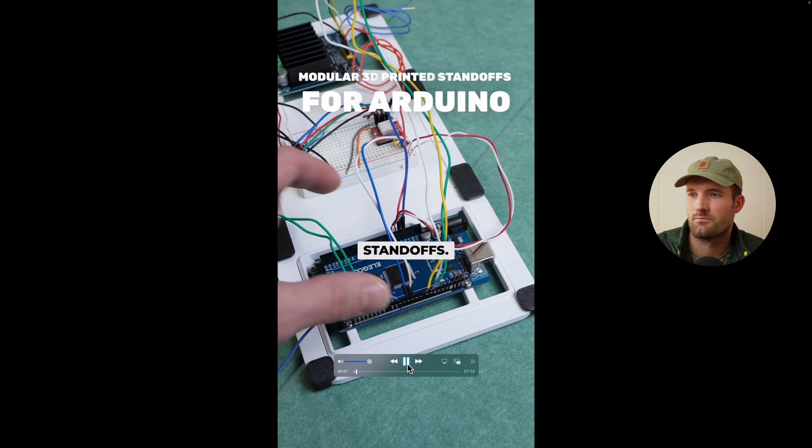Here's how I made these modular standoffs. While I was prototyping a new idea, I got annoyed at how unorganized things were. So I came up with this modular concept. I started off by making a standardized border piece the size that would work for most components.

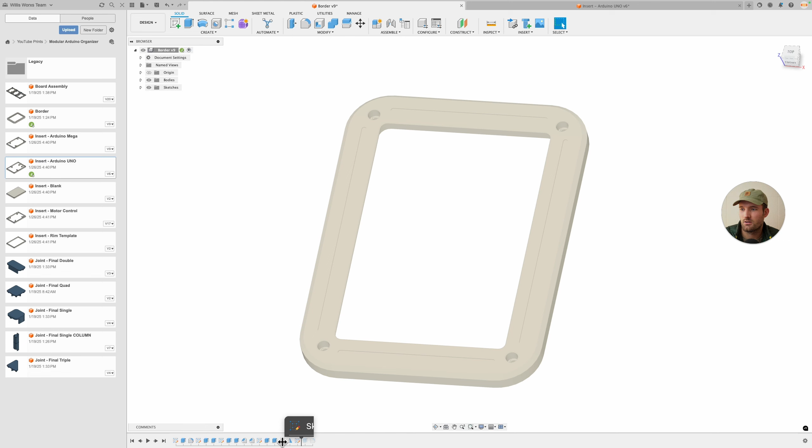So this is the border piece that I was mentioning earlier. Go ahead and make this a little smaller. And the way that I made this was I kind of just measured the Mega and then some other pieces and basically based it all off of that. And it took me a little while to figure out what my end shape would be.

So if we go back here to the first sketch, essentially I just made a size that I thought would work. So I did 120 by 80 as the inner insert size initially. And then you'll see here, I extruded that out and then added a fillet on the inside. And then I think I just basically created this new offset off of that.

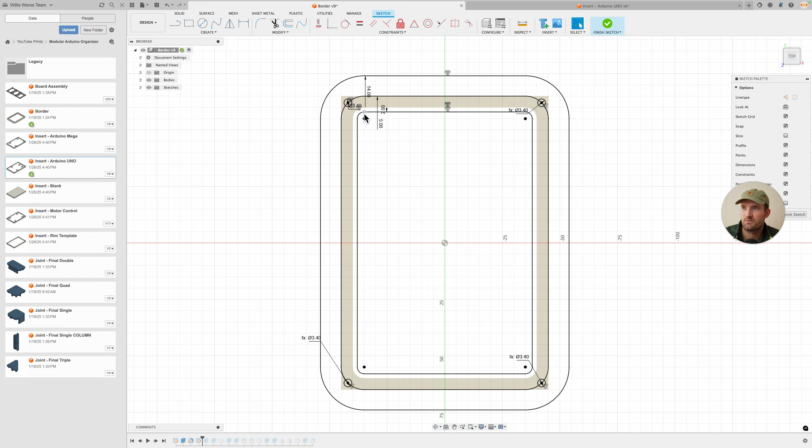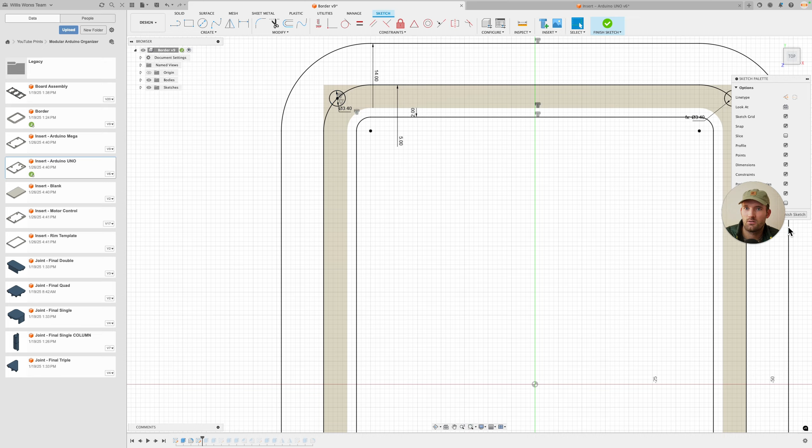And this is when I was playing around with where to put the holes. So I like symmetry in general. So if I put a hole here, I usually like to have the walls equal distance across. But I also added a chamfer here. So when I added that, the face here looked a little asymmetric. So I actually pushed this off a little bit further than I did this inside wall that I'm making here. And you'll see that here in a second where it's a little bit asymmetric.

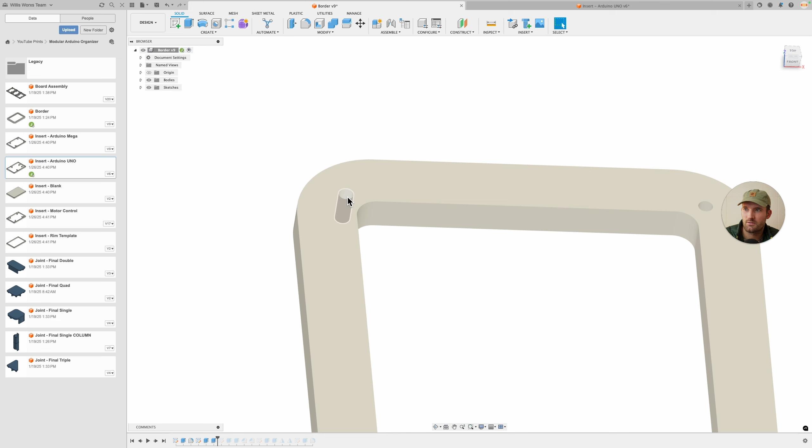So that's the outside wall, and I haven't made the holes yet. I just have the cutouts there for it. And you can see here that the hole is a little bit closer to the inside wall than it is the outside wall. But basically I know that in the future I'm going to add a chamfer here. And so you'll see that come in, and then it'll essentially be pretty similar as far as how much flat area there is between the center of the hole and this edge and the center of the hole and the chamfered edge there. So just going to keep stepping through.

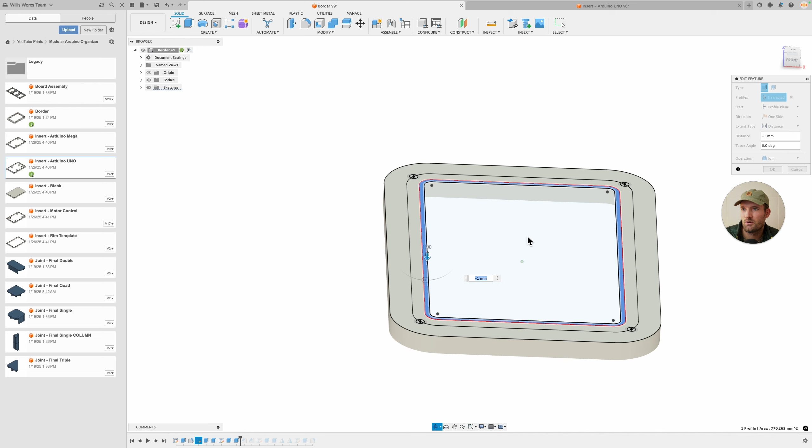And this is where I just added the offset so that the head of the bolt can be flush with everything, or recessed, I guess. And then stepping through, that's where I cut out all of the holes there. And then, let's see, here is where I'm adding this other offset on the inside. So that's basically to have a lip so that, as you'll see in a little bit, it'll hold the insert back essentially. And then we added that chamfer I was talking about.

Now you can see how the face is pretty much the same distance from this edge to the center and from this center to that edge. We can actually measure that real quick. I just use a line here. You can see it's 7 millimeters, and then to this edge, it's right at 7 millimeters as well. So that's why I did that.

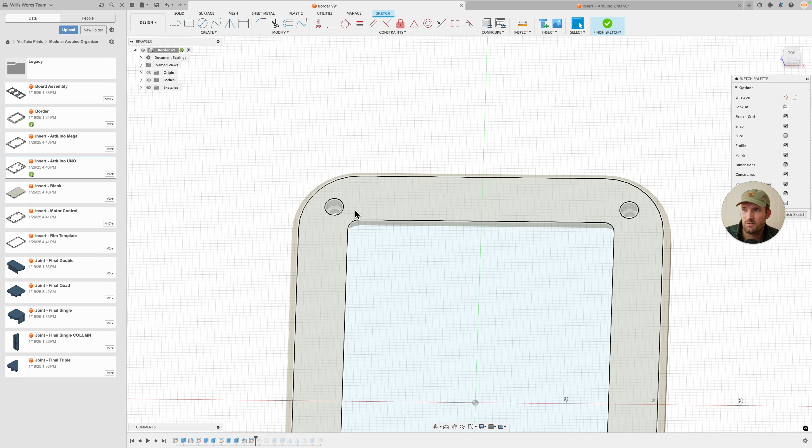I don't really know what the principle in design is as far as whether you're supposed to use the actual edge or the edge of the chamfer. It just makes more sense to me at the flat, because that catches my eye, how much flat is between the edge here and the edge here, rather than including the actual edge of the wall there in the calculation of how much space is between pieces. But that's just how I think about it. I don't know if that's technically true or not as far as what you're supposed to do.

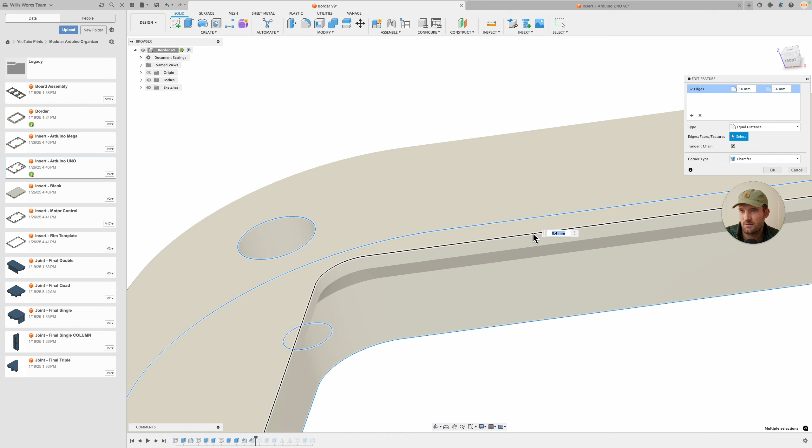And then here I just added a lot of small chamfers. So I talk about this a lot, but just adding even just 0.4 millimeters of a chamfer really makes the design look a lot better. Just the sharp edges, especially wherever it's printing against, it doesn't always turn out well. So I think adding that really just makes everything look a little bit more refined.

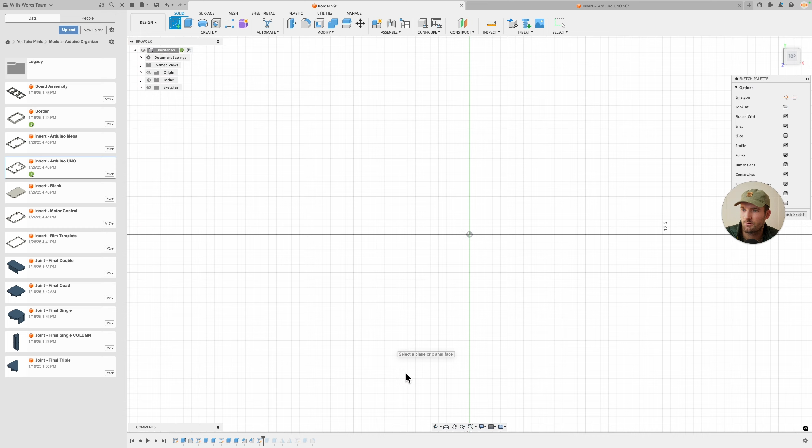And then let's see here. Okay, so this is going to be a part that I want to talk about a little bit, and I'll actually just remake this sketch just to show y'all what I'm doing here. So what I'm doing in this step, and it's really not necessarily needed for these smaller holes, but if you have a bigger recessed hole, it's really important.

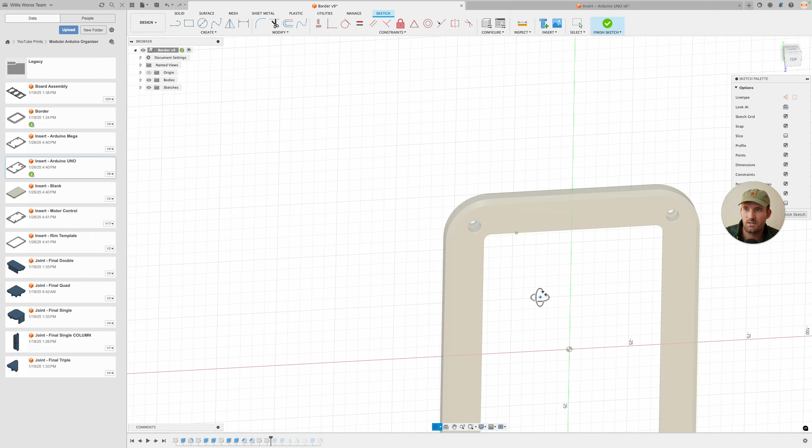And I actually learned this from Prusa, which did this, and then there's a video from Maker's Muse that also kind of demonstrated it. But essentially what we're going to try to do is force the printer to bridge over this, because we're printing this face down to give it a good texture. So it's going to be printed like that, like this is the bed plate. So what I'm doing here is I'm essentially about to force this to bridge, and the way that you do that is by making some rectangles.

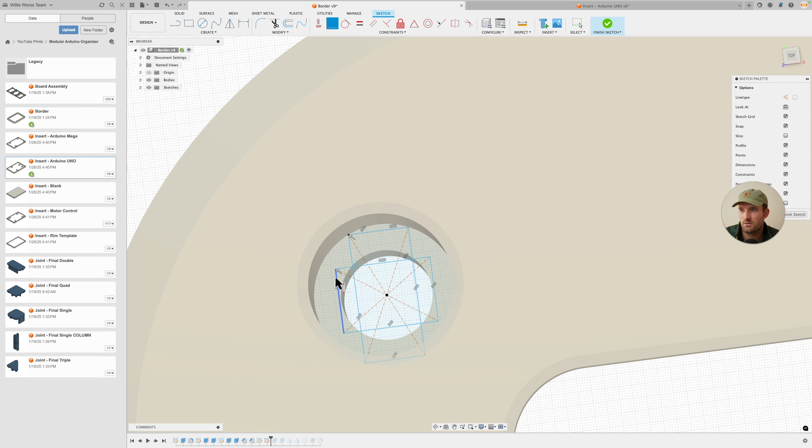And so I'll just zoom in, and then I could do some constraints here. So you're going to make one kind of this direction and one the other direction. And so each of these corners are going to be constrained to the edge of the circle there. And then I'll also make constraints that are tangent with the hole in the middle. So then tangent with that, and then I'm also tangent with this and this. And so now we have these basically two rectangles there.

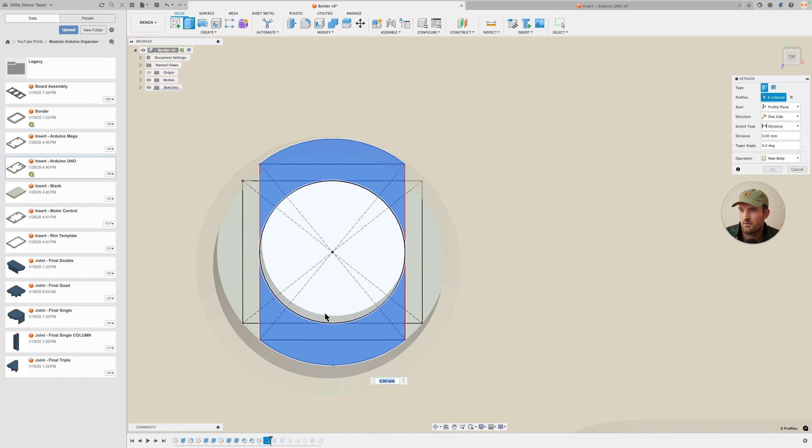And so the first step is I'm going to extrude all of this all the way across by -0.2. So just one layer height. So depending on what layer height you use, just take off essentially that amount. So -0.2. And so you'll see here, I can actually change just that face color. So we just extruded out that amount. So you can see there's a little wall there, and from there to there is 0.2 millimeters.

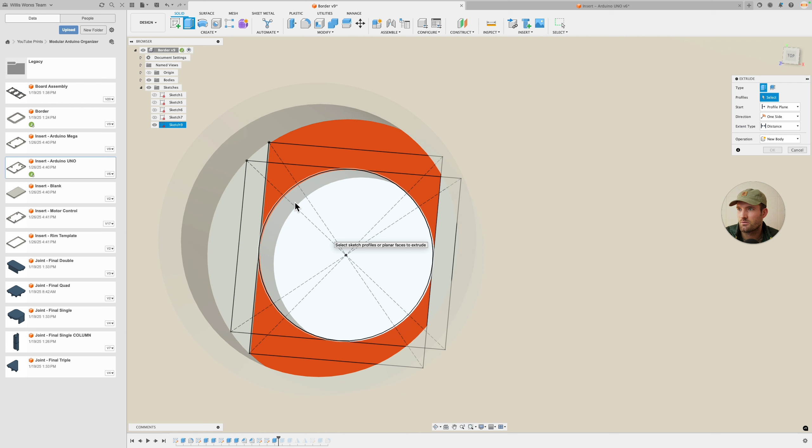And so now I'm going to bring back that same sketch again. And now I'm going to extrude again, just this square part. And now instead of just 0.2, I'm going to do -0.4. So basically 2 layer heights. Click OK. And so now you see we have another layer, and I'll just color that again just to make sure we're all on the same page there. So now you can see we have this, and this is basically 3 different layers.

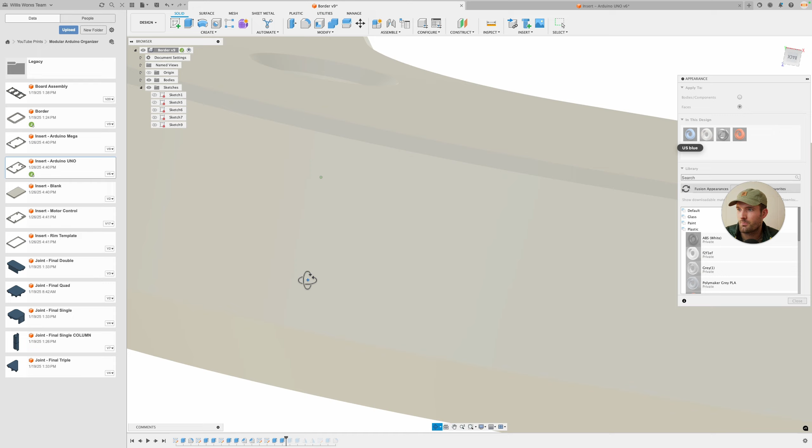And so what this is doing is, remember, we're printing this way. So we're basically coming up this direction. And then once it hits here, the printer is going to just go straight across. So it's just going to do a little bridge, and this is maybe 3 or 4 millimeters diameter, so it can bridge this really easily. So you're just telling it go straight across, and it's going to fill this in, and then on the next layer, it's going to go straight across again, because the orange is our next layer. So we're going to have this support, and then we're going to go straight across, and bridge.

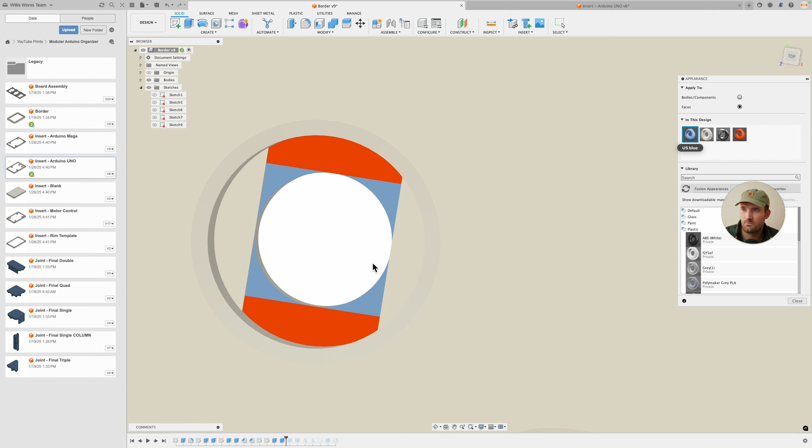And then it's going to do this circle, and so it's going to already have these 2 pieces that are kind of supporting it. So the circle should come out pretty easy, and that's just to prevent the need for supports here. So I just want to walk y'all through that, and I'll actually just export this really quickly and show y'all what that's going to look like. So just hold on just a second, and we'll pick back up once I'm in the slicer.

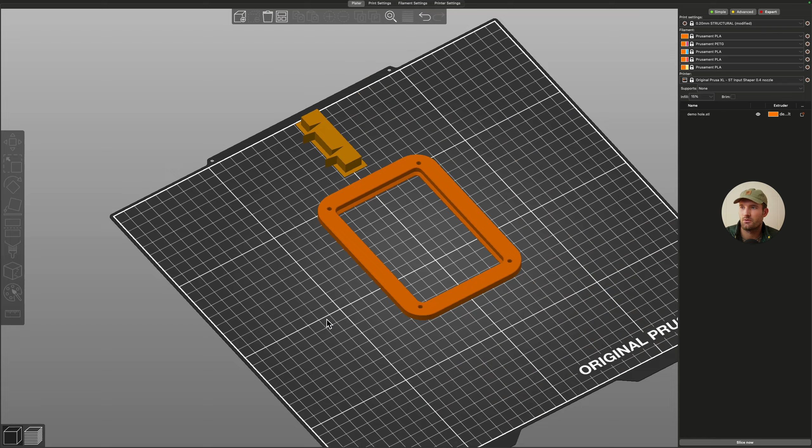All right, so now I have it in the slicer, and you can see here that's our feature that we made. So I'm going to go ahead and put this face down. The reason we're doing that is because we want the nice textured finish on the part that we're going to see the most.

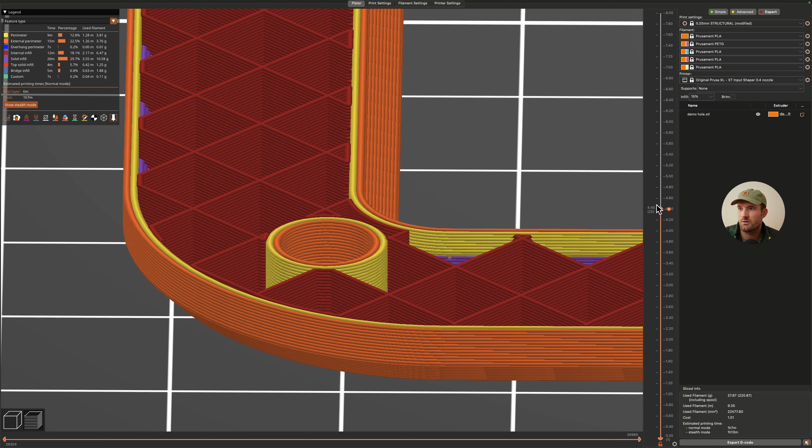So I'm going to go ahead and click slice, and you can see here on this one, which is the one that we did that operation on, how it has this kind of box shape, which is what we did. So I just want to step through really quickly what's going on. So this is just kind of the standard infill, and then once we get to our layer that we made, that's our first layer where we cut out basically this parallel part here, and you can see what I'm talking about. It's going to bridge straight across, which is what we want.

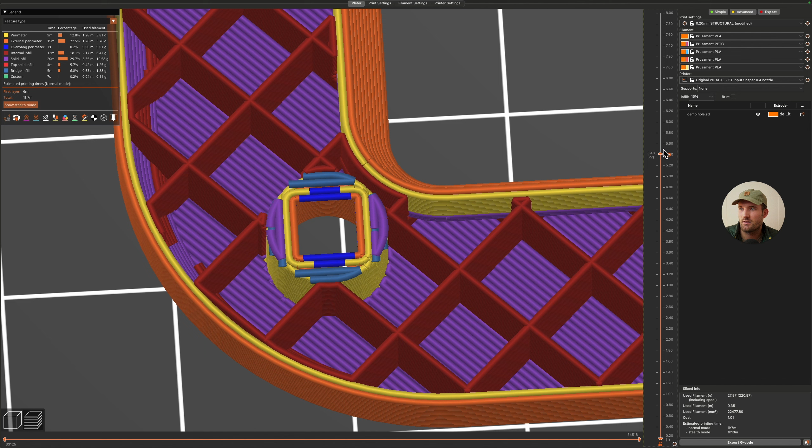And then the next layer, we bridge the opposite direction, and it makes kind of a square, but you can see it has support here. So really all that you're bridging is just these sides. And then the last layer is going to be the circle, and it's just going to carry that circle all the way up. So just wanted to explain that.

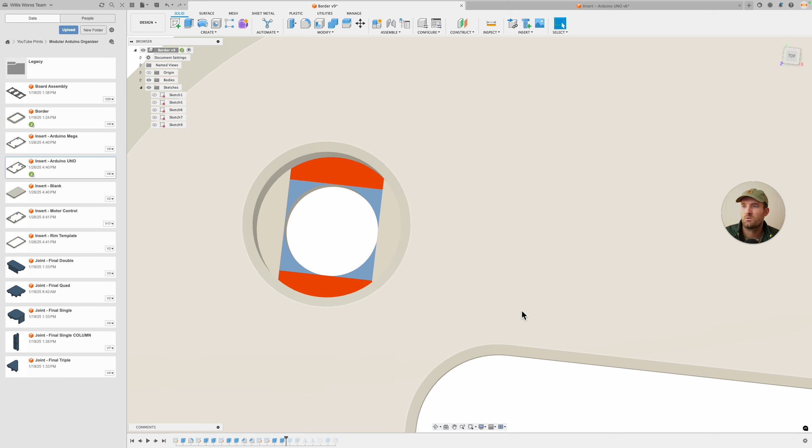I think that's really useful when you're doing bores like this, and it's particularly useful for bigger holes, because sometimes you can get away without this with the smaller holes, but especially for bigger recessed holes, you really want to try and do that. So just wanted to explain it while we were going through this. Okay, so I'm going to go ahead and delete this since I already did it. And then you'll see that I just basically do the same thing.

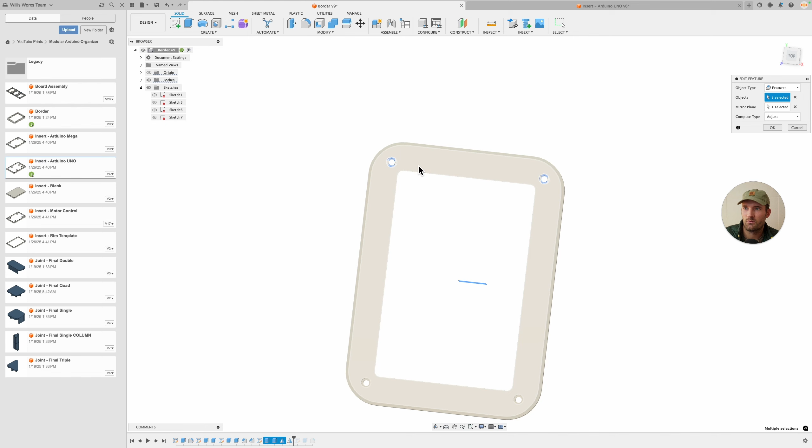And another thing that I did here is once I made those features that we just talked about, I mirrored it. So you can see here, I'm just mirroring these features across, so I don't have to do that same thing again for every hole. And then I mirror it again, both of these down this way. So that's why it's important to have the origin there at the center, so you can use mirroring, which is really helpful for speeding things up.

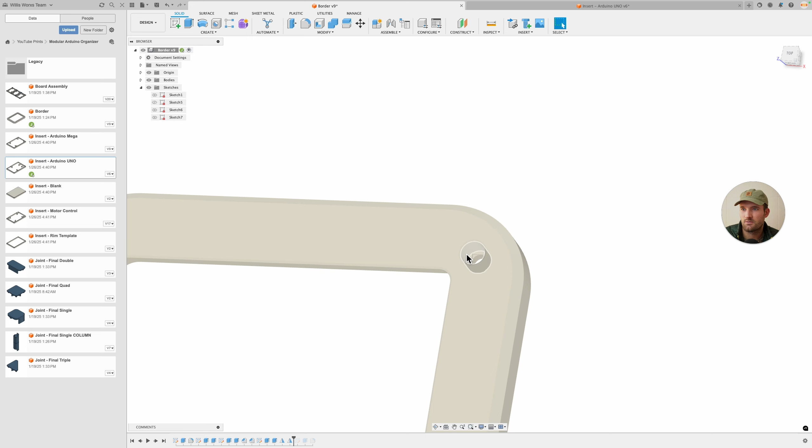Another thing you can consider doing, which is kind of beyond the scope of this video, is you could make a solid part. So you could basically just fill this in and then cut that out. So you could basically have a negative to cut these features out with, and they could be patterned and basically save you some time on that end.

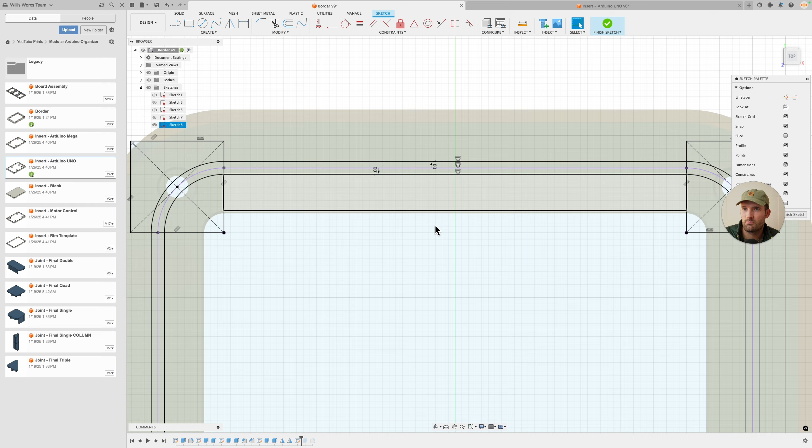And so now at the end, I pretty much had everything done, but I thought the front looked a little boring. So I added this last little feature here. What I did was I used that original curved line that I created way back here. I projected that into this, and then I had an offset 1 millimeter in both directions. And I basically just drew these rectangles around the part that are centered, if you consider that the midline. I use this as the center line.

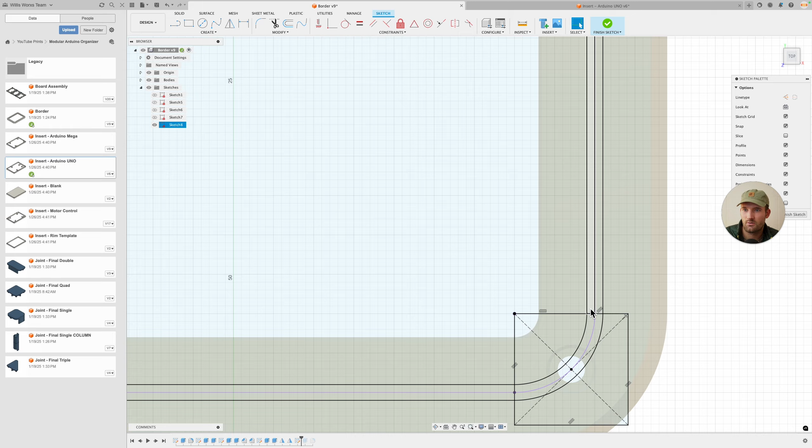And the reason I made these rectangles was just to square off the edges there at the edge of the circle or the radius. So then I had a nice rectangle to extrude. So then you can see here I extruded that. So now I have a small rectangle, and then I made them into slots by just filleting the edges there. You can see I had those filleted off. So that is how I made the outside part.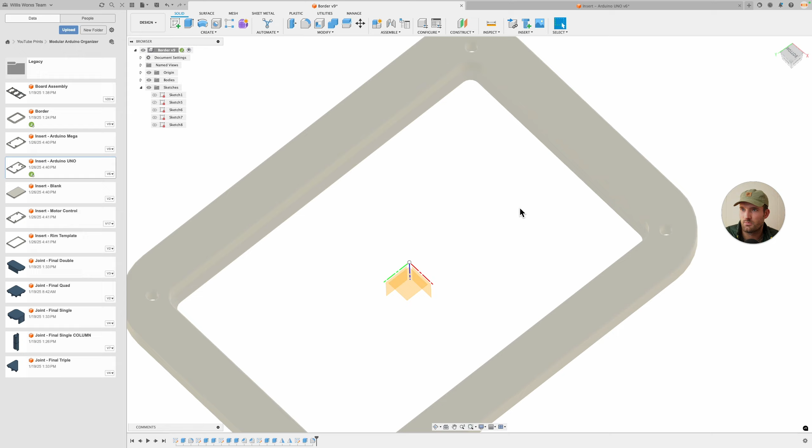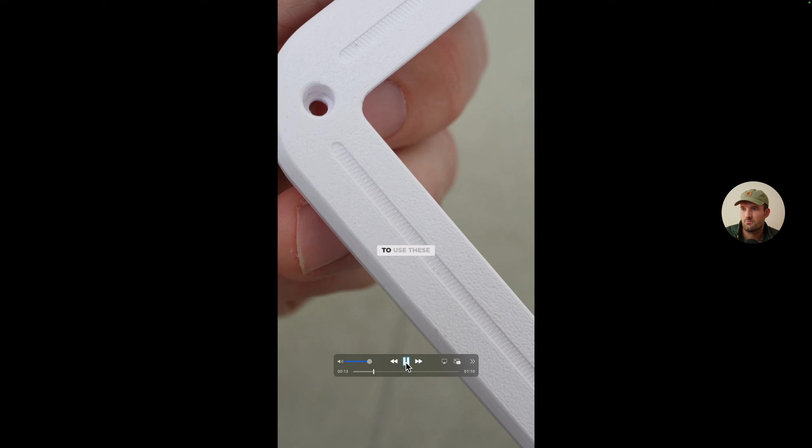And again, these are reversible, which I'll talk about shortly, but you can see how you can set these inserts in this way and they'll protrude up a little bit, or you can make them flush the other way. So we'll go back to the video. These recessed holes in the corners are to use these joint pieces with, so you can organize them however you want. I made joints for all 4 possible configurations.

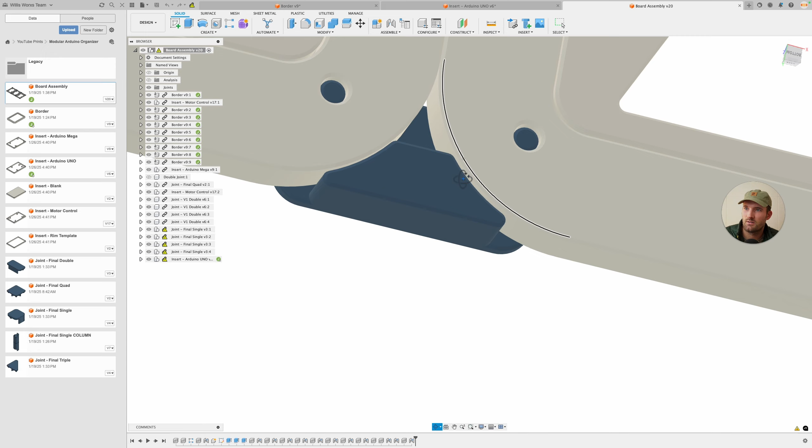The insert pieces, so the joints, I don't want to go into a lot of detail with that, but essentially all that I did was I created an assembly similar to this one. It's not this exact assembly, but I put these side by side, and then I just projected the holes out, and I projected basically the boundaries here and gave it a small offset, and then essentially just extruded out the holes there. And you can see here, for example, this is one of the assembly joints.

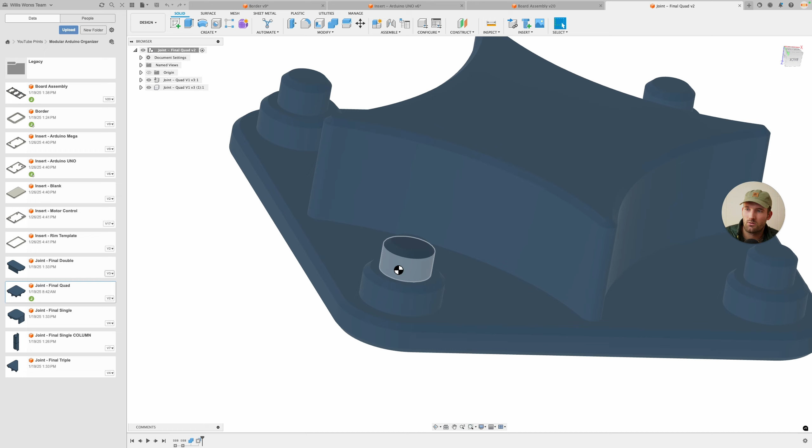So the reason that they're recessed like this is so that you can put these on either side. So if you put it on the top, you'll have the bigger recessed hole, so that should catch it. And if you put it on the bottom, which is also an option, this smaller kind of peg part will be the part that's interacting with the hole on that side.

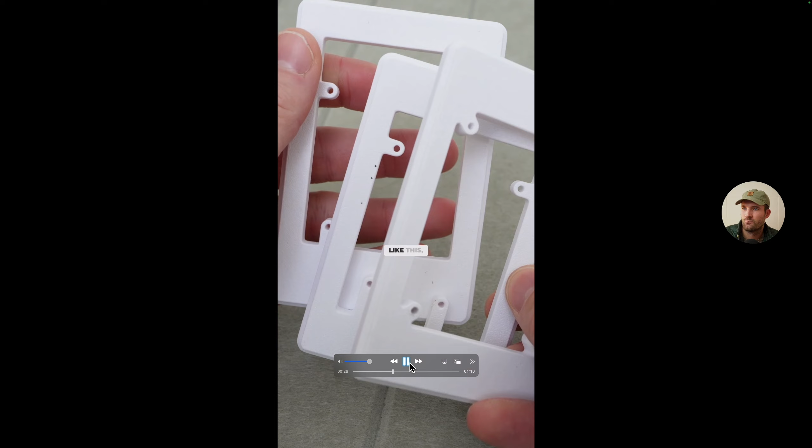Standoffs that fit the holes for different prototyping boards like these Elegoo Mega and Uno boards. My initial insert pieces look like this, but I ended up liking the slim border better to make things look more consistent. The reason some of these arms are at weird angles is to avoid the solder on the back of the boards. I also made a blank.

For the inserts, I think I did the Uno first, and it was fairly straightforward. So if you remember back to that first sketch I did, the inside part was 120 by 80, and you can see here I just made these 0.4 millimeters shorter in width and height. And so that gives you 0.2 millimeters on each side, which is a pretty good amount of clearance that I typically use.

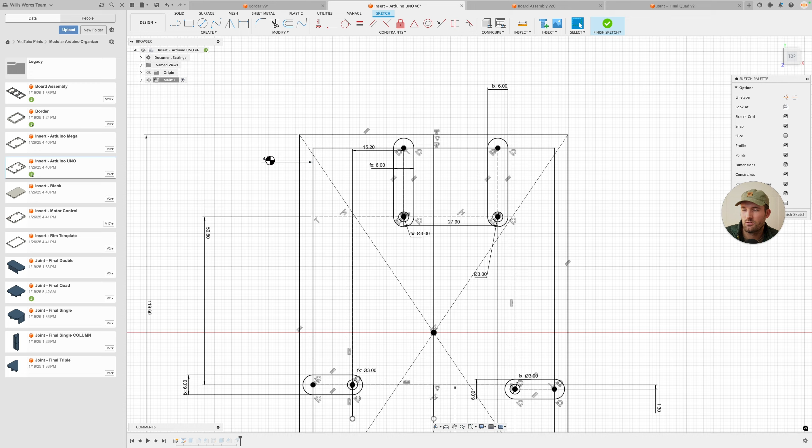And then after that, I basically just picked a standardized width of the insert of 4 millimeters, which I just thought looked okay. I didn't do anything special with math on that. And then this was just me finding the hole locations for the Uno in particular. And I couldn't find a great reference for those.

I used different sources online, and I ended up measuring a lot of it just to confirm, because these are a little offset. You can kind of tell here, but if you're just looking at it, it's kind of hard to see that. And then I adjusted where these were in space so that the Uno looked pretty much centered. It's not perfect, but it's pretty close.

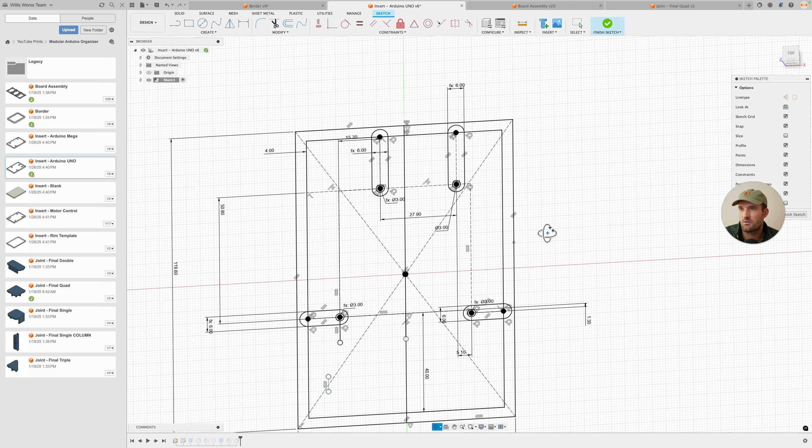And so I'll just step through this really quick. It's pretty straightforward once you get the hole locations, which is kind of the hardest part. So this is the first extrusion, and then I added the fillets here.

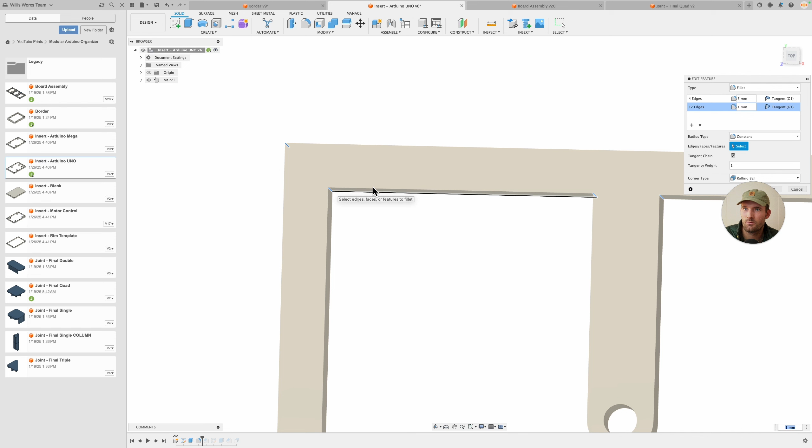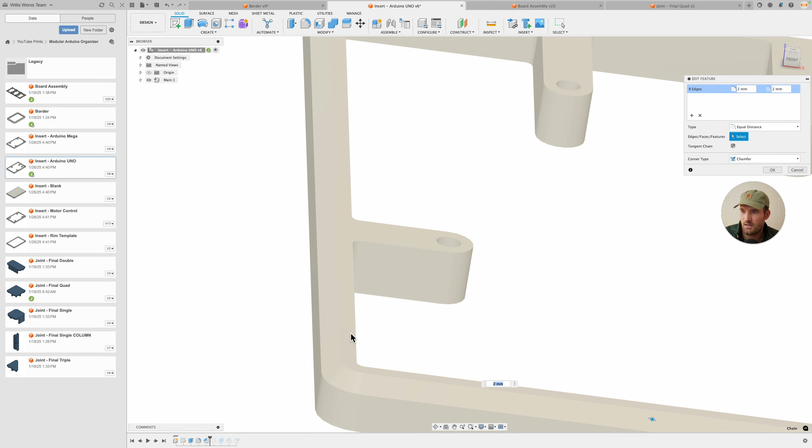And then that's where I just added the fillets in the corners and all the joints there to make things look a little smoother. And then the next step was I just added that fillet on the outside, and then that's going to fit flush with the border piece that we made previously.

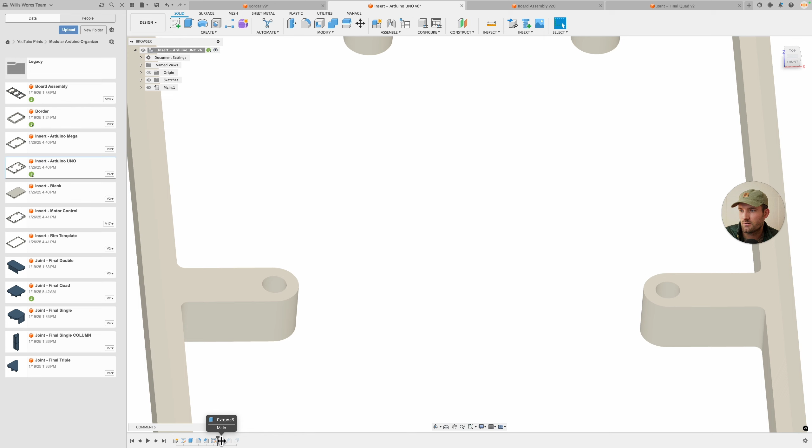And then this was just to basically make an offset here so that I could extrude everything up, and I didn't want to extrude over these holes, so I basically projected this whole surface, and that gave me a way to project this up to make it flush. And I'll open up one of the other files here in a second. And so I extruded that up. You can see there, basically used that part that I projected and then made that come up a little bit there.

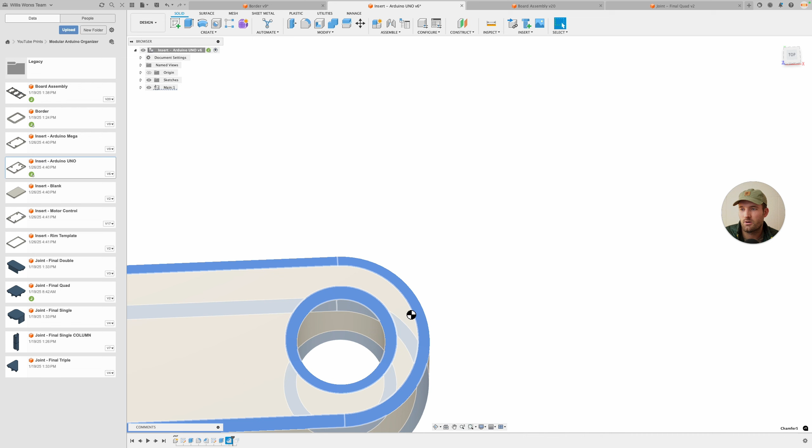And then I just added the 0.4 millimeter chamfer basically all the way around everything, and that really helps with the holes because that basically leads the bolt in there. And these are basically just friction bolts. They join from friction. Basically, you thread it into the plastic, and I think that works good enough. I mean, these aren't under a lot of pressure or a lot of force, generally speaking. And then at the end here, I changed the size of the part there so that it fits a little bit better.

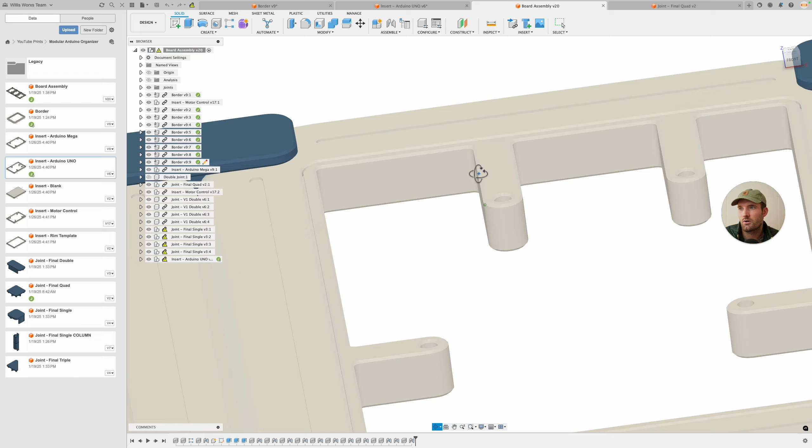All right. And so that's all there is to that. And then if we come over to here, let's see, this is the part that we were working on. You can see that that fits flush. And then I'll do an inspection here, section analysis. You can see how that fits flush up under. Oh, that's actually for the insert.

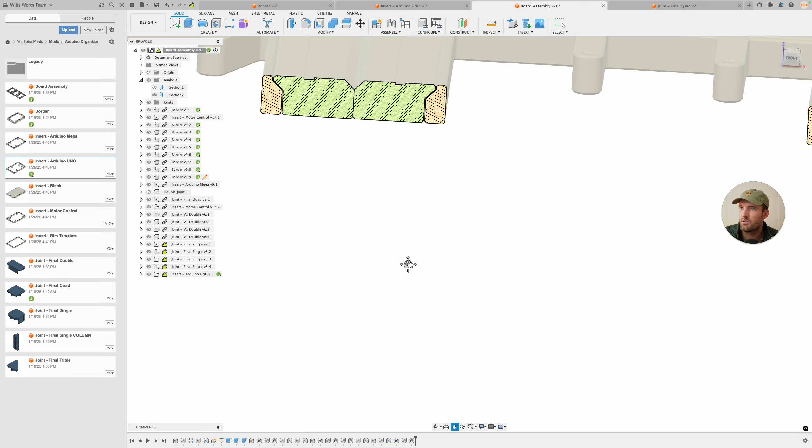So let's do another analysis here. And so you can see here that we have a nice 0.2 millimeter of space all the way through. So everything fits with a little bit of clearance there. And then everything is pretty symmetric and the same on both sides. So that is how I did that section.

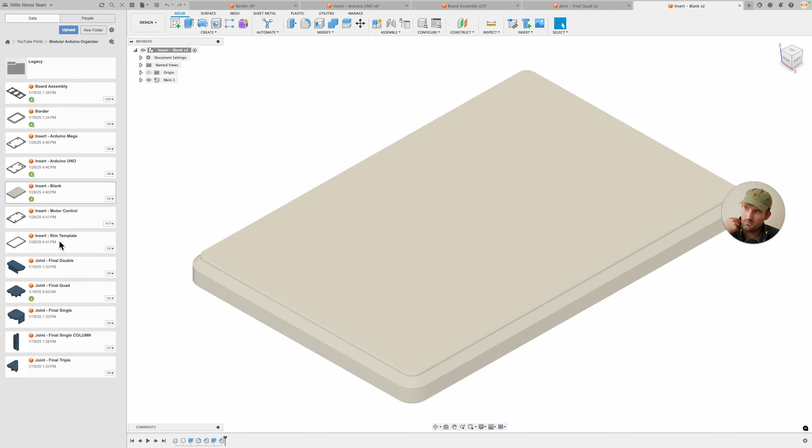And then let's just keep going here. So I made this blank one as well. So that's going to be this insert here. And if you go to the Skool community, which is where these files are available for free, I have this template one available too. So what I would do with this template, if I was trying to make another, basically offset. So right now it has this fillet at the end. So I would actually go back one to here, and then I would create my standoffs here.

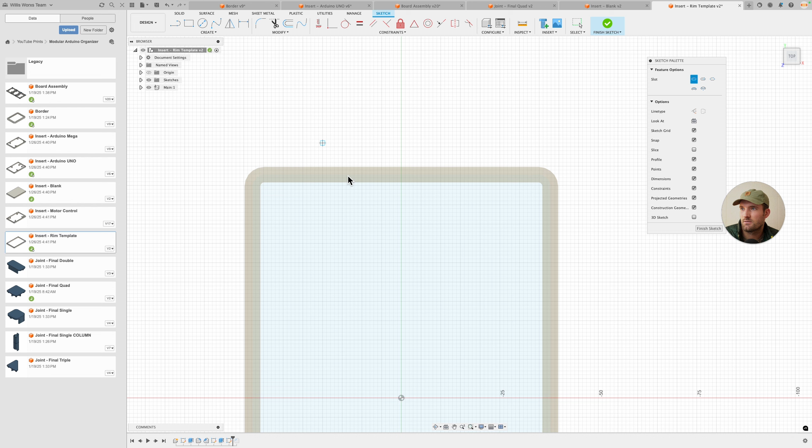So let's just pretend that we have another part. So I would probably use slot. That's kind of the easiest thing in my opinion. So you can just basically have it wherever you want here. And then I think this will be 4 to keep everything consistent. And then the hole would be here.

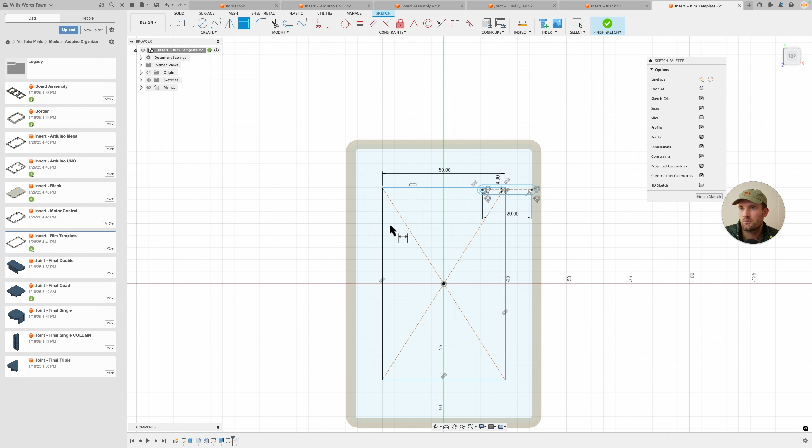And then you would basically just need to find how far off you need to go and then position it a certain way. And then if it's symmetric, you can use just this rectangle here and basically figure out the hole position. Something like that. And then instead of using that width there, this is probably the better way. And then whatever size screw hole you want. I think I ended up using like around 2 point something. Let's see.

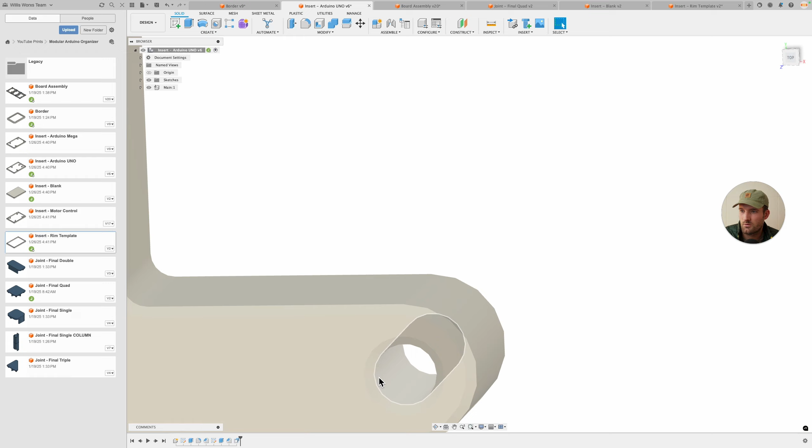So my final hole diameter here was 2.6. So it's probably a 3 millimeter thick bolt. So 2.6 seemed to work okay. It's a little tight, but it's close enough. And so you can imagine, if this was where your holes were, then you could basically just use this and mirror it around.

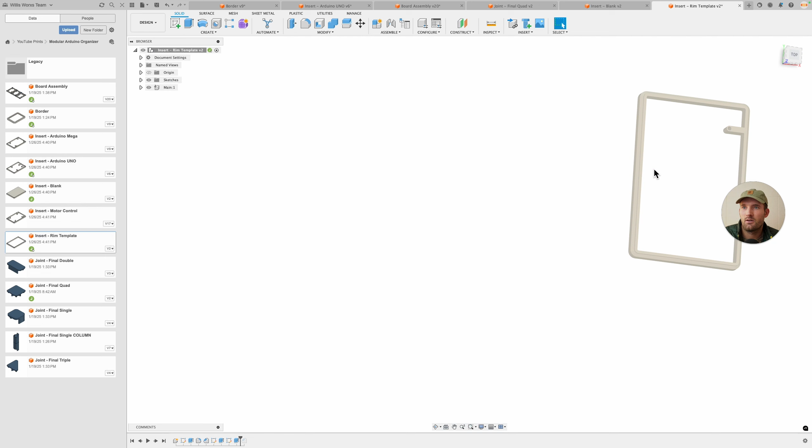So I'm just going to do that real quick. So we have that there. And so now that I have that, I can just copy it a couple times. So we're going to do create mirror, and then we're going to change this to features. And then our object is going to be that extrusion that we just made. And then our mirror plane is going to be the origin. So now we have both sides, and then we can just mirror it one more time.

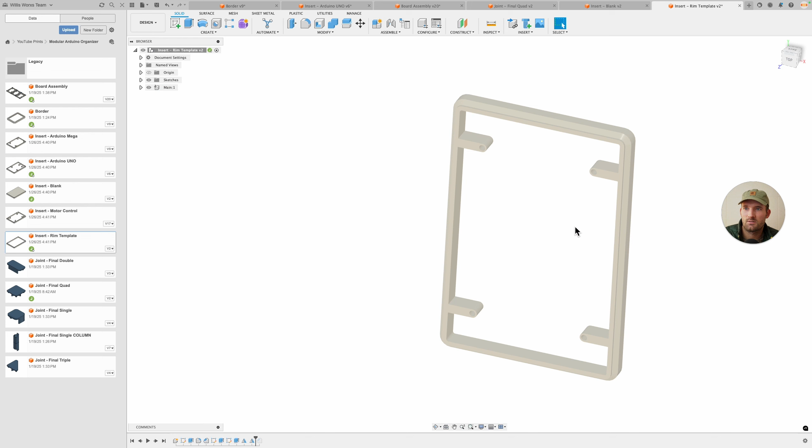Mirror, again, it's on features. Objects are going to be this and this, and our mirror plane is going to be here. And so this is just saying if those holes were in the same position. And again, you might have to change the angle a little bit depending on how you want everything to look. And then I would also add 1 millimeter fillets here if you just want everything to be consistent. You could actually have done this before we mirrored everything, but I'll just go with it now that we're here.

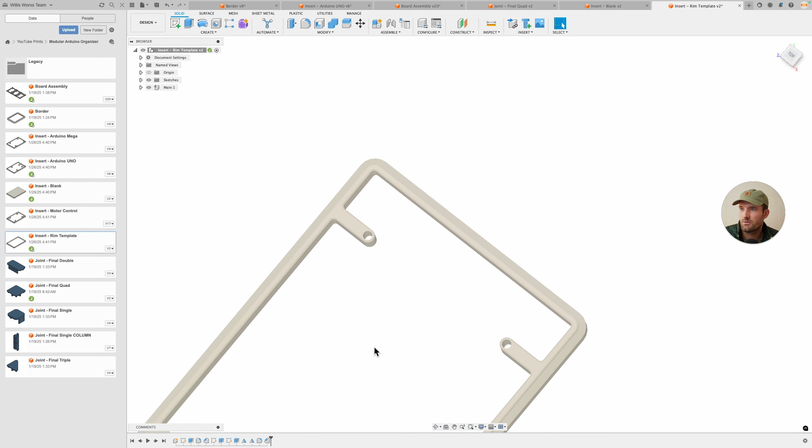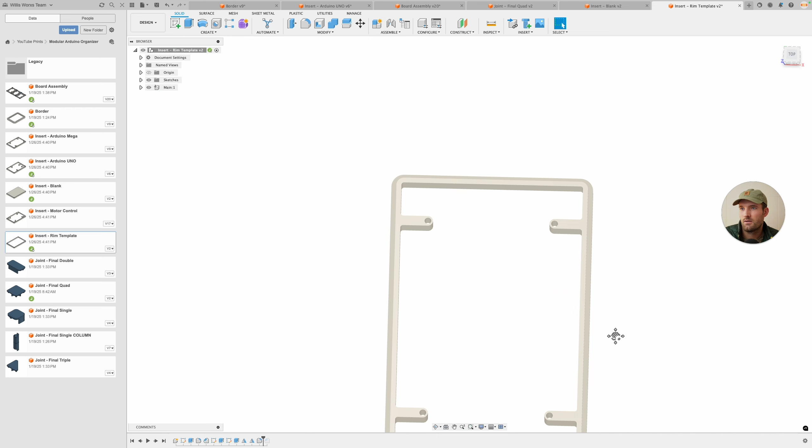Okay, and then the last step would be to add this fillet, which should apply to everything. And so now you've made your own template. So again, you can just take this rim template. If you have Fusion, just go before that fillet and then design whatever you want. And then remember to add 1 millimeter fillets on the standoff pieces here to make them the same as this, which is 1 millimeter, as you can see down here. So that is how you make your own custom insert. So I'm just gonna delete that and not save it.

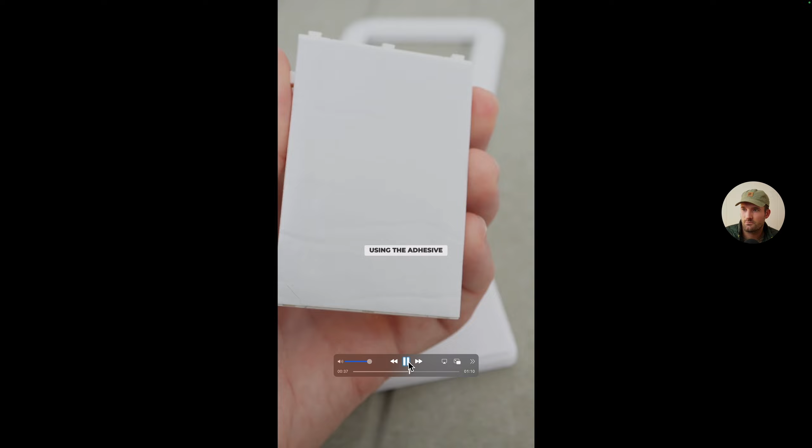And then this one again is just for adhesive things, which I'll show in a second, for attaching these breadboards using the adhesive on the back. The inserts are also reversible. Everything can sit flush like this. So this is what I was talking about. You can sit it flush, which is good if you're moving it around on the surface, but obviously you can't pick it up and move it anywhere with it this way.

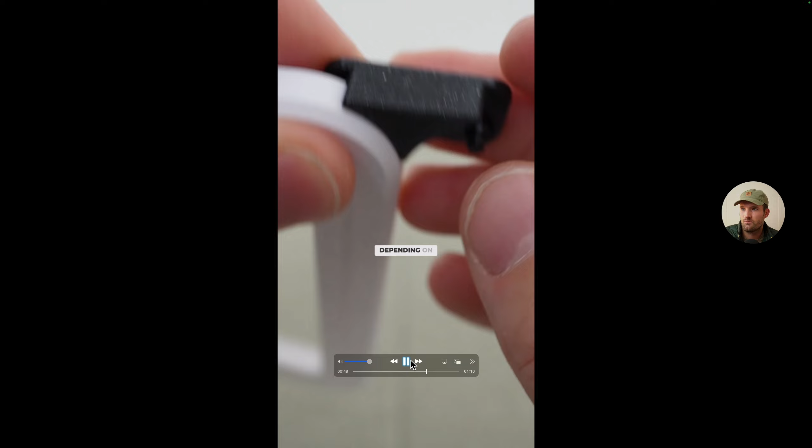Or you can flip the board over and sit the inserts inside of the border piece like this, so that way you can carry them around if you need to. The joint pieces can also be added to the top or bottom of the border depending on your preference. So this is where I was talking about the bigger part sits more on the front, and then on the back it's a little bit offset, but it still works okay.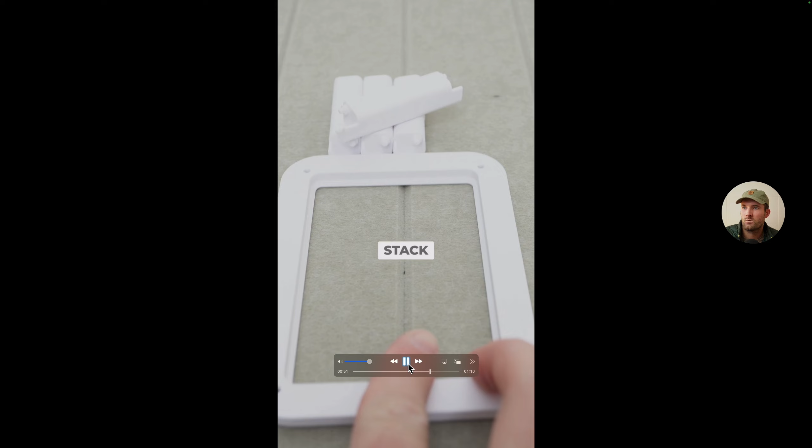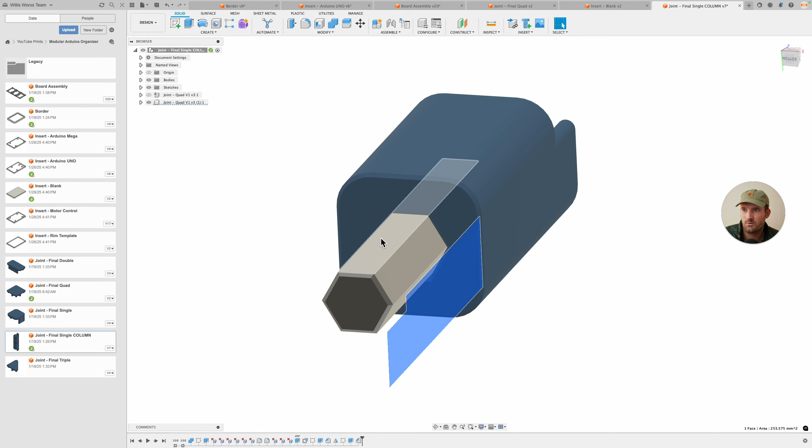Another neat feature is being able to stack them vertically using these supports to free up some extra desk space. This is just another concept I came up with. I took the single joint piece and basically extruded that out, and I added these hexagon rods. The reason I use hexagons, which I've mentioned in the past, is you can print this sideways really easily because the printer does straight lines really well, and these overhangs are really easy for it to print as well. So these usually come out pretty good.

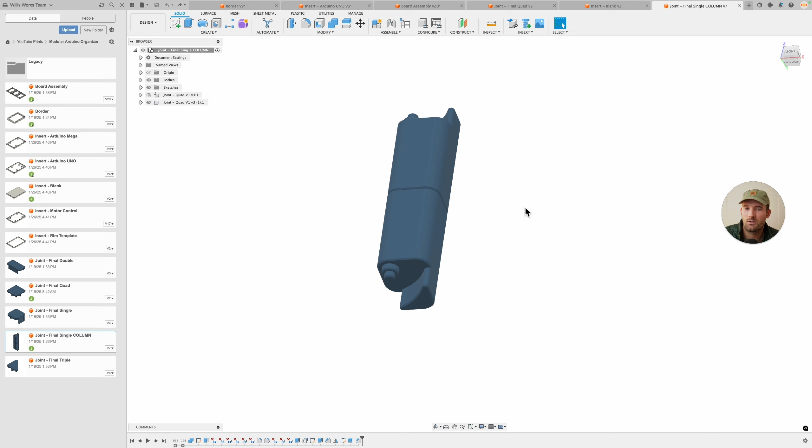I added a small amount of tolerance, so you might have to use a little bit of force to get them in, but it's pretty solid once you get everything all the way in there. And then you can just stack them up, which is a nice feature to save some space if you have your design ready to go and you just want to have it to itself. It's not super sturdy, but it's pretty sturdy. It's good enough for most use cases.

I made the supports print as 2 halves with this inner hexagon rod to join them together so that I could print both ends pointing up, which eliminates the need for support. So this is a big realization I had. There's a lot of stuff that is symmetric like this. You can eliminate the need for supports by just splitting it, and this is a pretty effective way to split it.

But I do want to mention that you need to print the A and B part for each section. They're not the same thing. They're like mirror images, but they're not the same. You can't just print all part A. You have to print part A and part B, and then the hexagon rod.

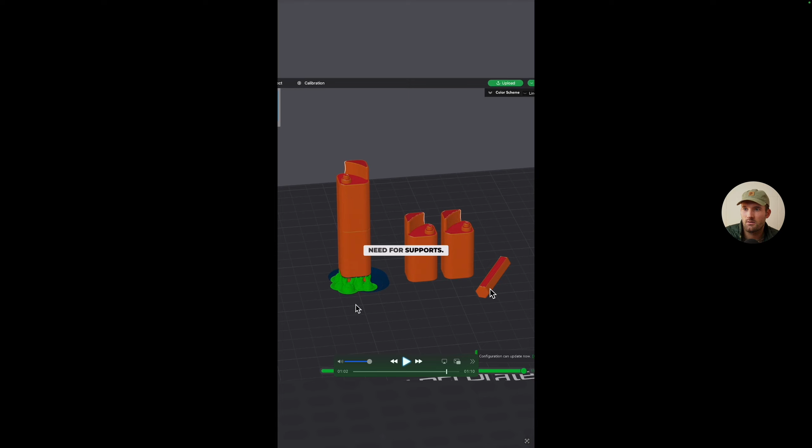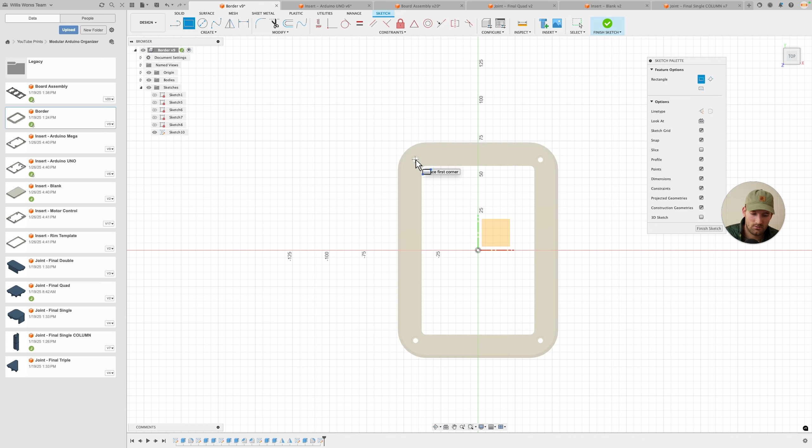As an extra bonus, you can even use the border piece to mount boards onto the side of a prototype like this. I think this is also a nice feature of this system, you can use it to mount things, and it's pretty straightforward. You just need to put the holes in the right spot. Let's see exactly where the holes need to be. I think it's 120. Actually, it's not going to be exactly 120. Let's see, I'll go ahead and find that real quick for anybody.

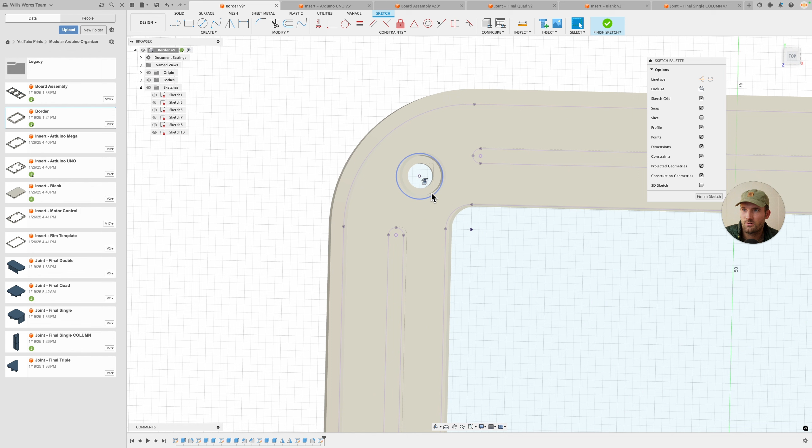I should have thought about that beforehand, but it's not a very intuitive number. So the easiest way to do that, in my opinion, would be to just put this into the part wherever it is and then project this off. Basically you would project these holes and you could extrude your holes into the part that way. It's not a perfect number. As you can see here, it's like 124.1 and then 84.1. So that could have been thought out a little bit better.

But when I was trying to make everything symmetric with the holes and with these different overhangs, I kind of lost track of what these distances were, which is really not a huge deal. It would just be a little bit more streamlined if there was a specific width that rounds off to a whole number.